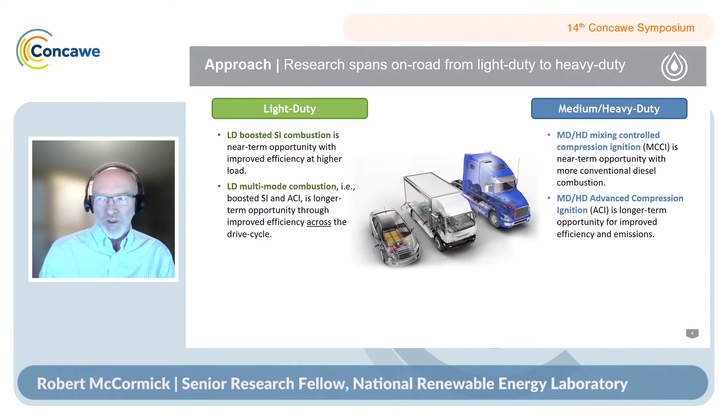Looking at the program's outcomes from a very top level, you can see that we were quite successful at demonstrating the potential to significantly improve the efficiency of light-duty engines using engine designs that were optimized for fuels having the right properties.

The work I'll speak about in the rest of my presentation is on medium and heavy duty fuels, where we've identified a number of different blend stocks that have performance advantages as well as significantly reduced life cycle greenhouse gas emissions. We've also identified a potentially lower cost path to reduce engine-out and criteria pollutant emissions.

The whole idea of Co-Optima, whether light duty or heavy duty, has been to focus on the concept that equivalent fuel properties result in equivalent performance regardless of fuel chemistry. But of course we have to pay attention to fuel chemistry, because the people trying to make the fuels work at a molecular scale level. We've spent quite a bit of time developing molecular structure property relationships and trying to understand how fuel chemistry affects properties.

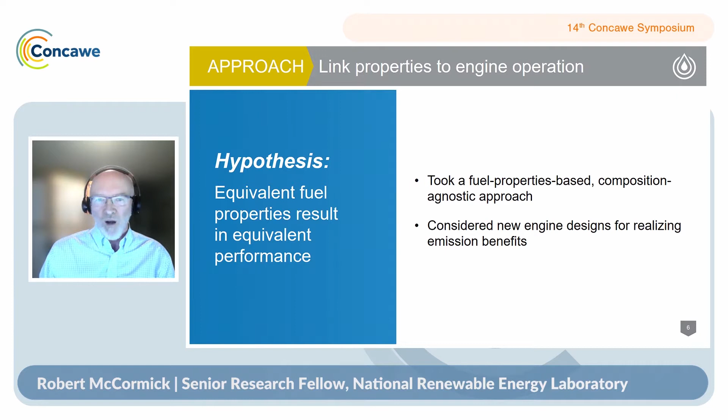But when it comes to engine performance, we've focused on fuel properties. For diesel fuels, anyone who works on them will be quite familiar with this list of properties. The fuel has to rapidly ignite, it needs to completely vaporize, and cold weather operability can be an issue, so we need fuels with a low freezing point or a low cloud point.

Fuel pump and injector operability or durability is a critical feature. Fuel has to be handled safely, and stability and storage can be a significant issue for certain fuels.

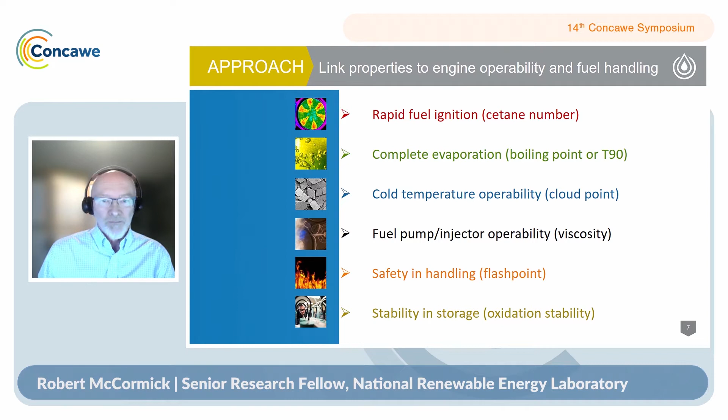Our approach to identifying fuels was looking in the literature and to biofuels researchers. We came up with on the order of 1,000 potential biofuels, which were then screened based on their properties.

At a very high level, the tier 1 screening was just: can it be a fuel? Does it boil in the right boiling range to be a diesel fuel? Does it have a high enough cetane number and other properties? For some of these materials, the properties were just predicted—we didn't have any volume of the material.

At the next level, we tried to measure properties that had been predicted, and Co-Optima has been a blending strategy where we're focused on blends with petroleum-derived fuel of up to about 30 volume percent. So in some ways it's a transitional strategy from where we are today to where we need to be by 2050. Obtaining the blend properties was important in the second tier.

And then in the third tier, we're actually evaluating fuels in engines, looking at well-to-wheels greenhouse gas emissions, and performing techno-economic analysis regarding the fuel production.

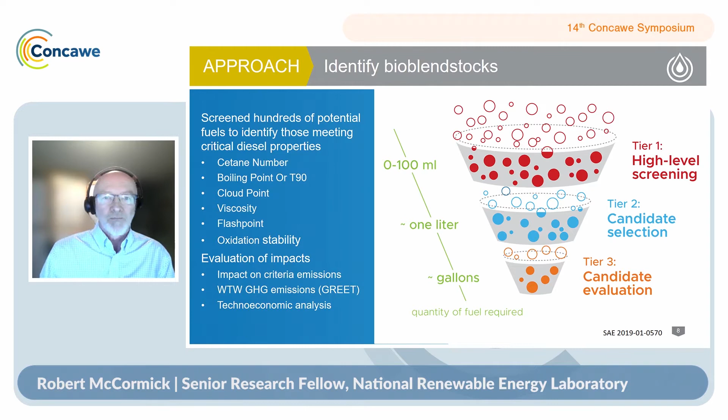So here's the outcome of a lot of that effort: 13 blend stocks that have at least the potential to reduce greenhouse gas emissions significantly. They have good fuel properties and potential to be produced at larger scale for those that are not produced from fats and oils.

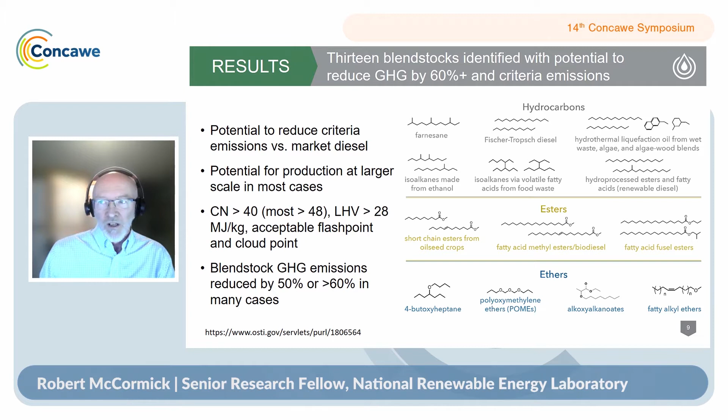We have the fats and oils produced fuels, biodiesel and hydrocarbon renewable diesel, on this list, but the other fuels are generally produced from larger scale available biomass feedstocks.

In terms of entering the market, the hydrocarbon fuels, of course, have the lowest barriers. There's a set of ester fuels—there are esters on the market today, so there would be more barriers to putting these on the market than the hydrocarbons. But the ones with the highest barriers entering the market are the ethers, which have not generally been used in commercial diesel fuels.

Potentially, some of these would require storage stability additives, and an assessment of toxicity and biodegradation is critically important. That's ongoing and should be available in the next few months.

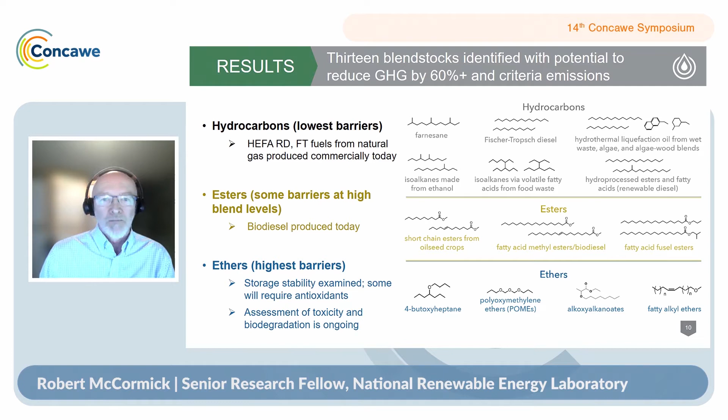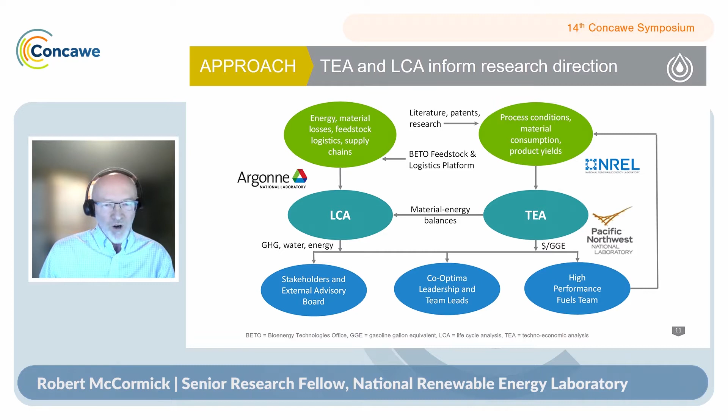So in order to analyze the environmental impacts and potential costs, we've used the Argonne National Laboratory's GREET model, and coupled that with techno-economic analysis—essentially a top-level process design that gives us energy inputs to make the fuel. The techno-economic analysis itself gives us a modeled fuel selling price that we can compare.

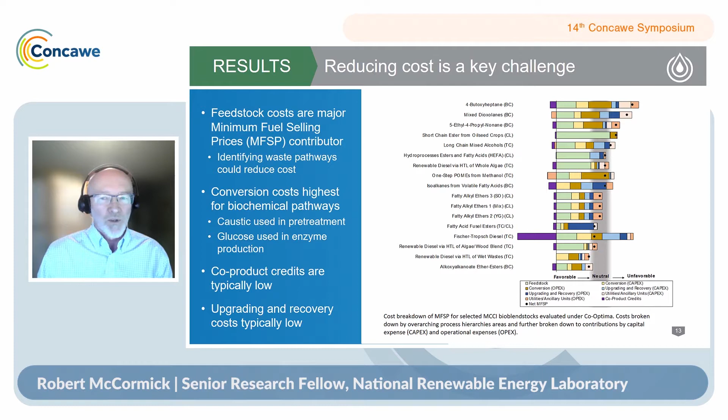There's a few that have modeled selling prices that are barely in the favorable range, and that's because they come from extremely inexpensive feedstocks, such as wet waste.

I'll go into just a couple of details. Here we have an example of hydrothermal liquefaction, where one could do it from wet waste with a water treatment as the first step, or from algae, which eliminates that step, or from woody biomass more directly.

The woody biomass has higher greenhouse gas emissions in its production and higher costs. But if we look at the algae case, we're just barely meeting our greenhouse gas emission reduction target of 60% with costs in the neutral range. But if we use the very inexpensive wet waste feedstock, we can get significantly lower greenhouse gas emissions and have a modeled cost that's starting to look more reasonable.

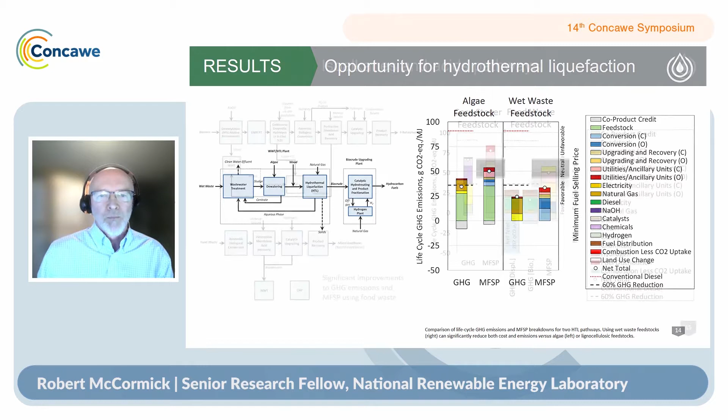The other example I'll show is isoalkanes made from volatile fatty acids. If you start from biomass, you have on the top a fairly complex process, but if you start from very inexpensive food waste, you have a lot fewer boxes in the flow chart.

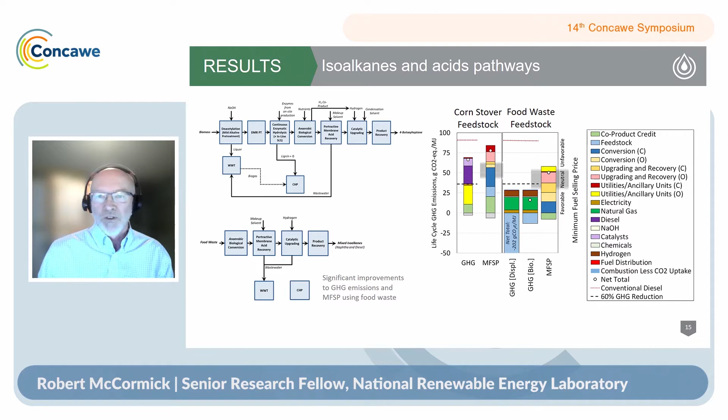From a biomass feedstock called corn stover, we're unable to achieve our greenhouse gas emission reduction targets with this feedstock, and model costs are high. But if we use food waste, which is of course not available in anywhere near the same quantity as corn stover, we can, depending on how you allocate, achieve significant greenhouse gas emissions reductions or even very large ones, and model costs are starting to look more favorable.

The next aspect is moving into examining these fuels and engines. I'll show you some data acquired in a single cylinder research engine that was built to be exactly the same as a commercial medium duty engine produced by Ford.

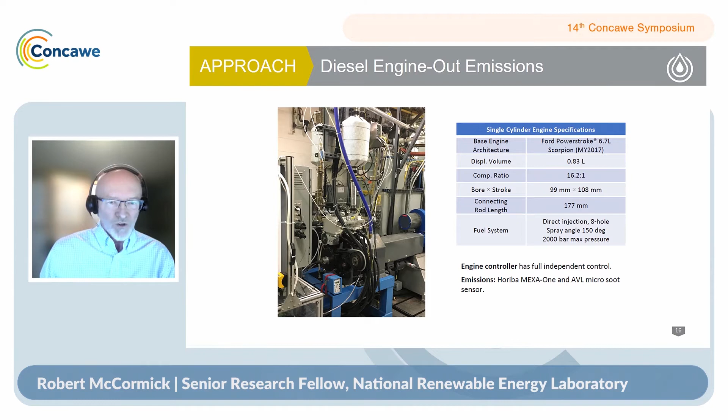As a single cylinder engine, we have control over all the engine operational parameters, as opposed to testing these fuels in an actual commercial engine in a vehicle, where the manufacturer's computer would control the engine operation.

We tested these as 30% blends, and so the list of fuels is here. These are fuels from the previous list, or in some cases surrogates for them - by that I mean similar molecules that we could obtain in the tens of liters quantity required for engine emission testing.

The chart here is a NOx soot trade-off chart where we show NOx emissions on the x-axis and soot emissions on the y-axis, and we're doing a sweep of exhaust gas recirculation. Out here on the right at 5 grams per kilowatt hour of NOx, we're about 25% EGR rate, and then we increase EGR, which reduces NOx, but at some point causes soot to go back up.

The black line at the top is the conventional petroleum-derived fuel. The next group are the hydrocarbon biofuels, and then we move into the oxygenates. You're able to go to higher EGR rates without seeing a spike in soot emissions.

And then for the polyoxymethylene ethers, which are the purple line at the bottom, it's very difficult to get this material to make soot, so it can tolerate very high levels of EGR, achieving quite low NOx emissions. But while these results are good, they're not big enough reductions to really change the design or the size of the diesel emission control system used on heavy duty engines today.

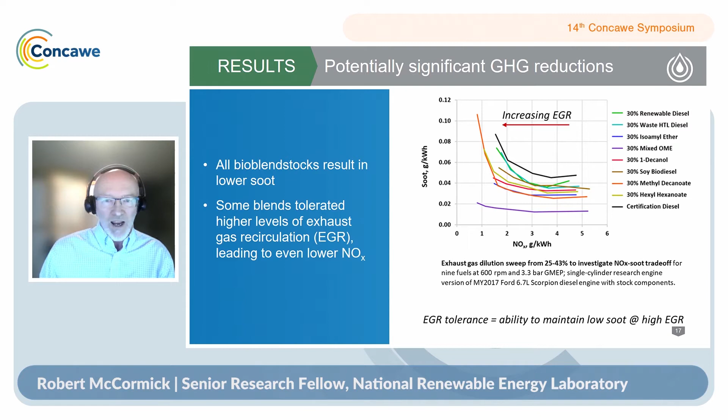So we looked to engine combustion changes to try to achieve lower emission levels. My colleague at Sandia National Laboratories has developed an approach called ducted fuel injection that is motivated by a Bunsen burner concept.

If you look at the Bunsen burner on the right, the fuel is injected through the nozzle in the center into a tube or a duct, and this causes a lot of air to be entrained from the holes in the bottom of the burner.

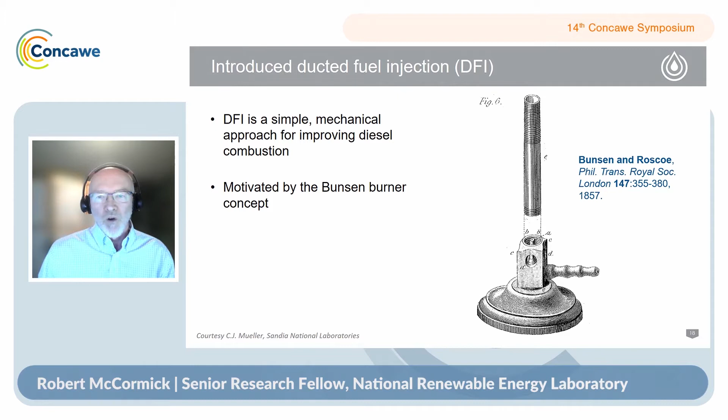You can actually do the same thing in a diesel engine. This photograph is a high-speed photograph taken from a single-cylinder diesel engine that has an optical window in the cylinder, looking up through the piston to the engine head, where we can see on the left a 2-hole fuel injector, and the injector on the left is conventional diesel combustion.

You can see the diesel spray, and you can see the bright yellow and orange, which is incandescence from hot soot.

But the injector on the right is equipped with a duct, and for that injector, we don't see any incandescence from hot soot. We see only a blue flame, indicating that the vast majority of this soot has been eliminated by injecting the fuel into the duct and dramatically increasing the amount of air that's mixed with the fuel spray.

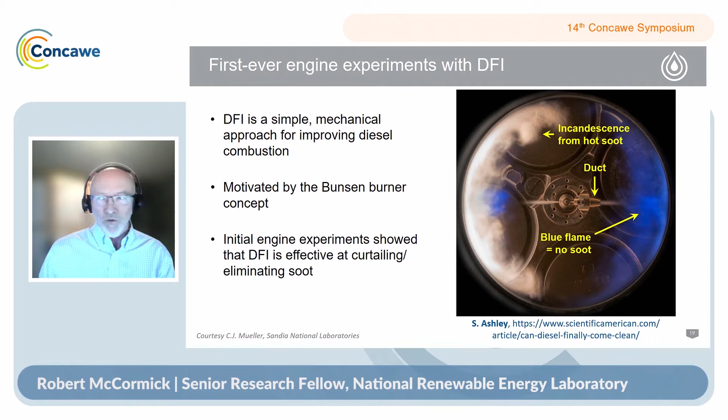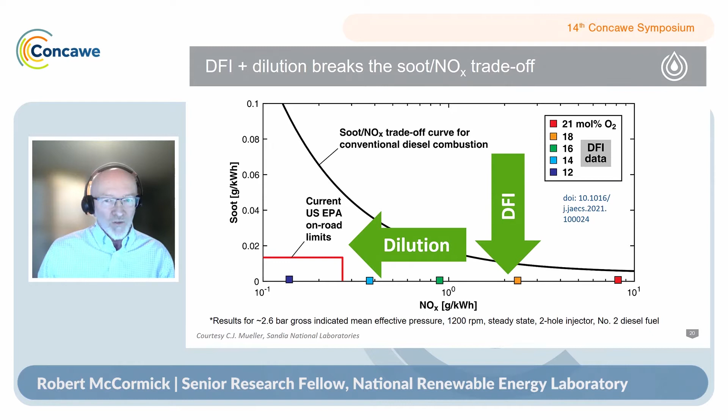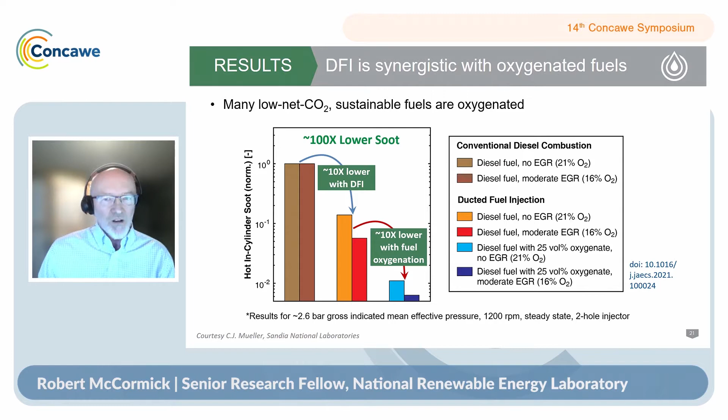At the same time, we can use pretty high levels of exhaust gas recirculation to reduce NOx. So this may be a large enough reduction that we can reduce the size and operating cost of the diesel emission control system on the engine.

So just quickly summarizing: we've identified blend stocks with relatively low carbon emissions, meeting diesel property requirements, that have reasonable production pathways from various forms of biomass. We've also identified a potentially lower cost path to reduced engine-out emissions via ducted fuel injection.

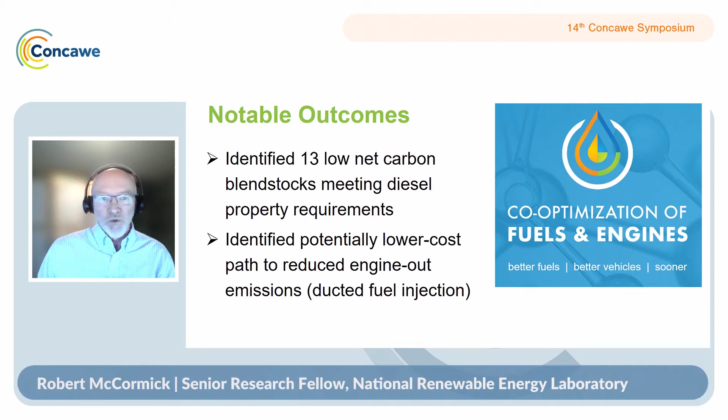To take Co-Optima to the next level and fully realize its potential, we have a number of recommendations. One is to continue working to reduce fuel carbon intensity, understanding all the factors that cause fossil carbon emissions and how we can eliminate them. Another is working to achieve higher fuel blending levels — 30% is very much an interim level — and expanding that to ultimately get up to 100% low net carbon fuel.

Working to scale up the production processes, ultimately to commercial scale. But in many cases, we just need to scale up to the point where we can make enough fuel for a really detailed evaluation. And of course, continuing to improve our pollutant emissions profile.

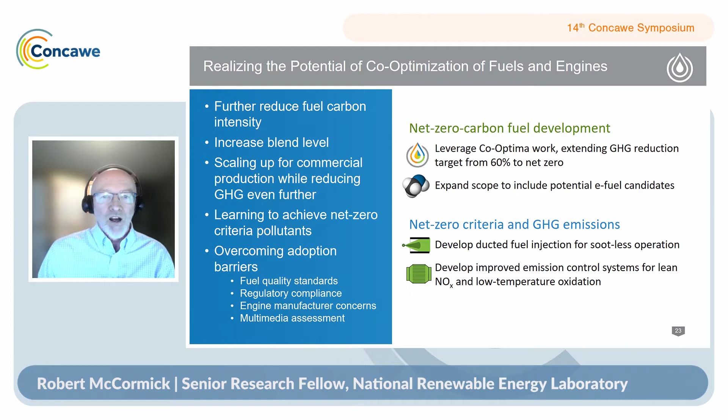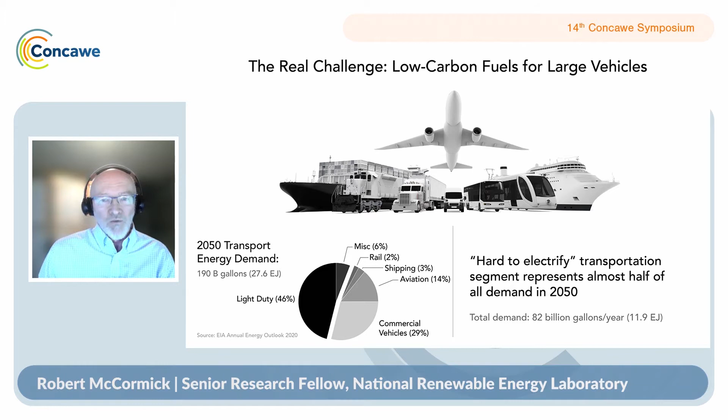Where the Department of Energy is going with work in this area is toward large, hard-to-electrify vehicles — definitely aviation, large marine vessels, and rail — with a de-emphasis on fuels and combustion for light-duty vehicles, and maybe even elimination of focus on that work, along with a de-emphasis on work for on-road heavy-duty vehicles.

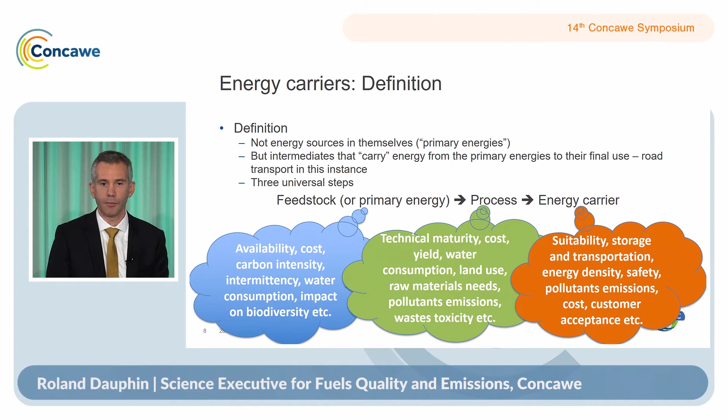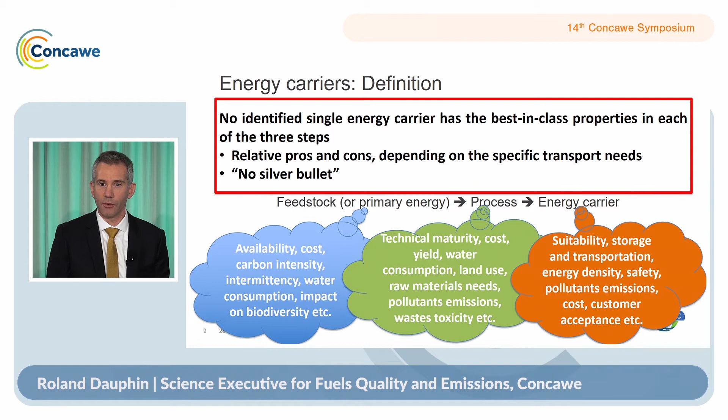When reviewing all the different existing energy carriers and the ones that can be foreseen, it's quite easy to see that there is no existing single energy carrier that has the best-in-class properties at each of these 3 different steps. At each time, you have relative pros and cons, depending on the needs of the specific transport that you are considering, which basically means, and I know that it is an idiomatic expression now, but there is no silver bullet, because, in fact, you have always benefits and drawbacks for each of the energy carriers that you may consider.

We have grouped the energy carriers in 3 different categories: electricity, liquid fuels, and gaseous fuels. So let me start with electricity first.

Our central scenario is the 1.5 tech scenario from the European Commission in their report Clean Planet for All. In this scenario, the electricity would represent more than 50% of the final energy use by 2050 compared to less than 25% today. In order to do this, the installed capacity would be multiplied by roughly 3, which is, of course, a huge increase. And by 2050, the electricity mix would be mostly renewable. 83% of the generation capacity would be renewable, mostly relying on wind and solar energy.

But it's not 100% renewable for this mix. You still have a small share of non-renewable sources with nuclear power plants, 12%, and natural gas using carbon capture and storage, 4%. If you consider the whole electricity mix with carbon capture and storage, it generates net negative CO2 emissions overall.

Additionally, as a sensitivity case, we have also considered 100% renewable electricity mix in order to compare what would be the different outcomes.

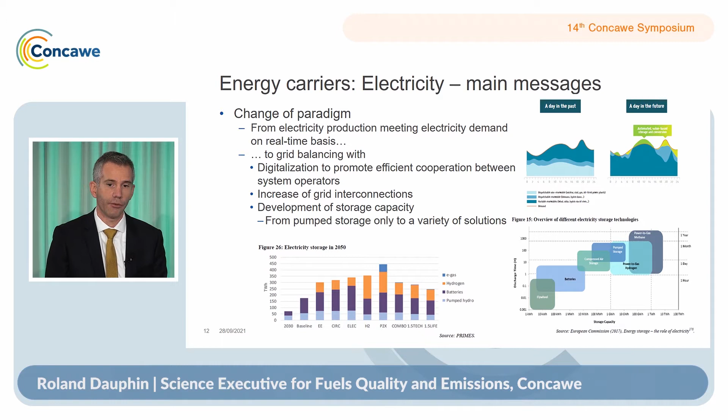Now moving on to liquid fuels, we have two main categories, and they have been mentioned quite extensively yesterday in session 1 and 2. We have biofuels and e-fuels. So regarding biofuels first, of course the stake here is to move away from biofuels made from food and feed crops to more sustainable biofuels using more sustainable feedstock.

The different processes allowing to produce these biofuels are detailed in the roadmap. It has been also detailed yesterday. I won't spend too much time on that for the sake of time.

But what is important in terms of message in our roadmap is that biofuels are not an alternative to electricity. They are a complement because both of them complement each other very well. And especially with biofuels, which can be used in many different sectors, they fit well with passenger cars, heavy duty, maritime, or aviation.

Regarding e-fuels, you probably know that they can be made out of renewable hydrogen and captured CO2. They can consist of chemically very different compounds, some of them drop-in, some not. But the real trouble with e-fuels is that thermodynamically speaking, they are very inefficient to produce. And once you put them into an internal combustion engine, you have another stage of inefficiency, which means the overall well-to-wheel efficiency of e-fuels is very low, especially compared against direct electrification.

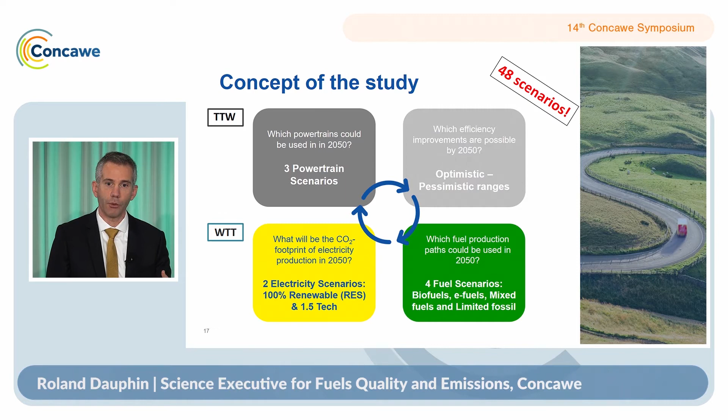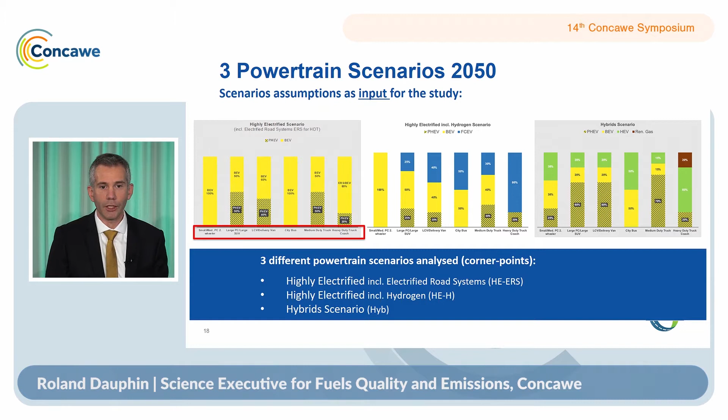For each of these scenarios, we have considered a different fleet mix for each vehicle category. On the left-hand side, you have the small vehicles category, 2-wheelers, small passenger cars, and moving to the right-hand side, you find long-distance transportation up to heavy-duty trucks.

In the highly electrified scenario, you see that there is still a share of plug-in hybrid electric vehicles. You have to know that in this case, these vehicles are highly electrified, driven between 70% and 90% of the time in electric mode. You can also see that for heavy-duty trucks, they rely on electrification either by using battery electric vehicles or electrified road systems.

For the scenario using hydrogen, the use of hydrogen is done through fuel cells and is dedicated to long-distance transports.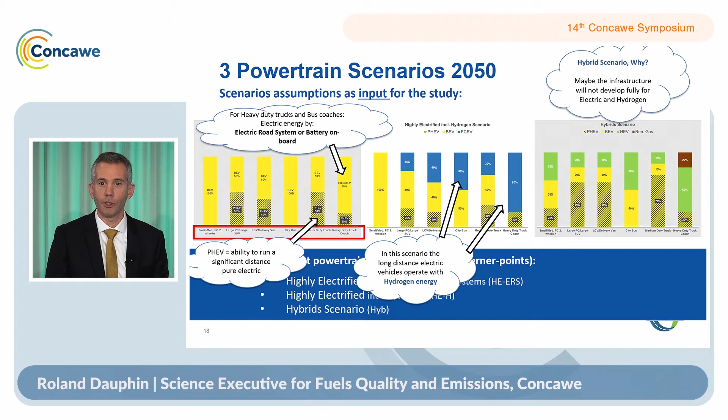The last scenario, which we have named hybrid, is a scenario in which we have considered that maybe the infrastructure regarding electricity or hydrogen would not be deployed fast enough, as in the other two scenarios, and so we would still need to use the existing infrastructure with internal combustion engines and liquid fuels.

So now some details about the fuel scenarios. We have a scenario relying a lot on biofuels, up to 90% of the liquid fuels. Another one relying a lot on e-fuels, up to 100% of the liquid fuels. A scenario which is mixed, really in the middle. And even a scenario which has a limited fossil content, only 10%, just to check what it would take in terms of compensation measures if we don't manage to get rid of fossil fuels by 2050.

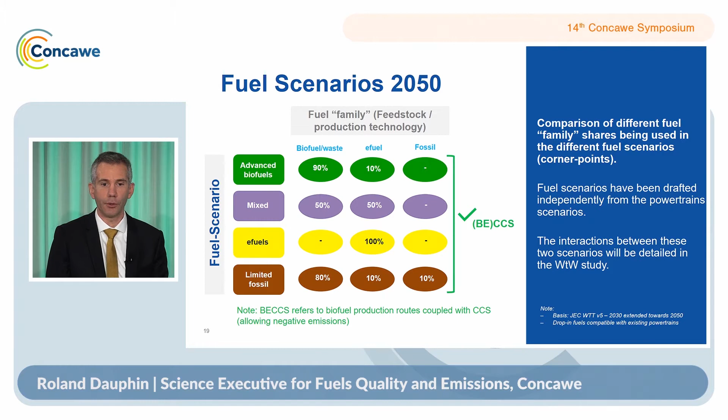In order to do our evaluation, we have simulated an energy system, and you can see in this picture the scheme of this energy system. It's quite complex, so just to try to simplify it, you will find once again the 3 steps between energy carriers and primary energies.

On the left-hand side, you have the primary energies. It can be biomass, waste, wind, solar, fossil resources, if they can be used. And on the right-hand side, you have the energy carriers, which are either direct electricity to the vehicles, liquid fuels, biofuels and e-fuels, or hydrogen, or even fossil fuels.

In the middle, you have the processes which transform the primary energies to energy carriers. And you have one masterpiece in these processes, which is the electricity generation. Electricity is used virtually everywhere, to feed the vehicle with direct electricity, but also to produce hydrogen, which is necessary to produce e-fuels, and also you need electricity to produce the biofuels. So this is really important, to care about this particular piece of the energy system.

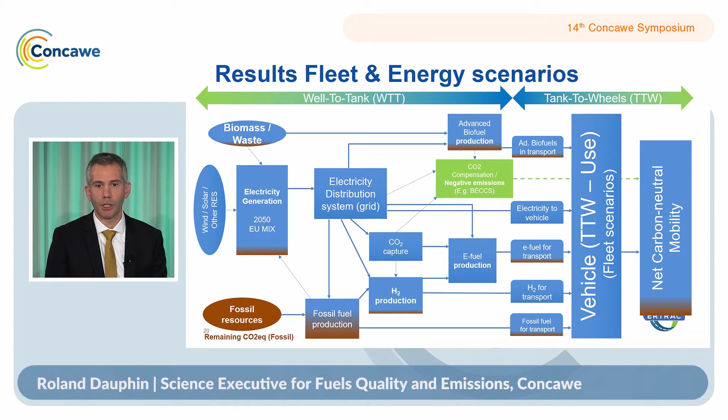Because even if you get rid of fossil fuels, this energy system is not completely carbon neutral. You need offsetting measures to compensate for the remaining CO2 emissions. And this is the purpose of this green box that you can see in the middle of the energy system, which are the negative CO2 emissions that you can generate, for instance, by using bioenergy, carbon capture, and storage.

So now, the results of the simulations. You can see here the results of the evaluations of the 48 scenarios in terms of well-to-wheel energy demand. When I'm saying well-to-wheel energy demand, it means that we have considered the energy that would be lost in producing the energy carriers, the energy that is consumed on board when you drive your vehicle, but also the energy required, for example, to capture CO2 and put it underground, or to use it for producing e-fuels.

What is interesting is to compare the different scenarios in order to understand which parameters play a great role in your energy system design. An important conclusion is that if you want to rely a lot on e-fuels with internal combustion engines, it is almost mandatory, of the highest importance, to get 100% renewable electricity, because if you don't, the well-to-wheel energy demand will literally skyrocket and reach unreasonable levels. So the conclusion is that for e-fuels, it is mandatory to get 100% renewable electricity.

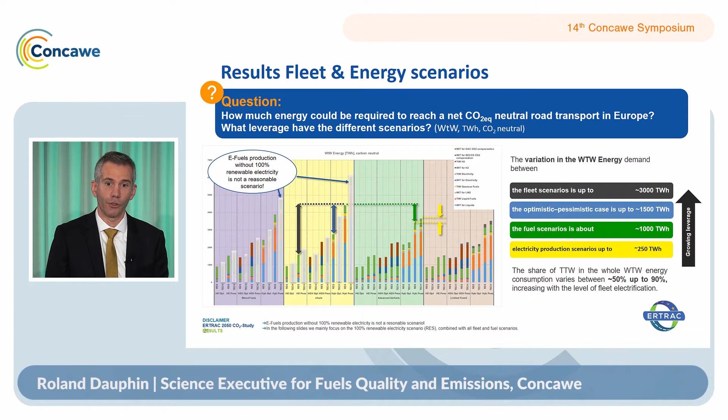So another question was about the electricity demand. You remember that electricity generation is at the core of the future energy system, and how much electricity you would need in this future energy system, how much electricity you need to generate. And here the range is really huge.

In fact, the range is between 20% of today's electricity demand and up to 160%. The lowest range, 20%, is still very significant, but it's reached in scenarios where you rely a lot on internal combustion engines and biofuels. This is where you need the least amount of electrification. At the other end of the spectrum, you have still internal combustion engines, but this time fed with e-fuels, and this is where you reach 160% of today's electricity demand in Europe.

And of course this is a huge number, which has to be, I remind, 100% renewable, and you may wonder if it's reasonable to consider such a high amount of renewable electricity by 2050 only for road transport. In the middle, and rather towards the lower end, you have the highly electrified scenarios, which require between 40 and 55% of today's electricity demand, which is still, as you may consider, very significant.

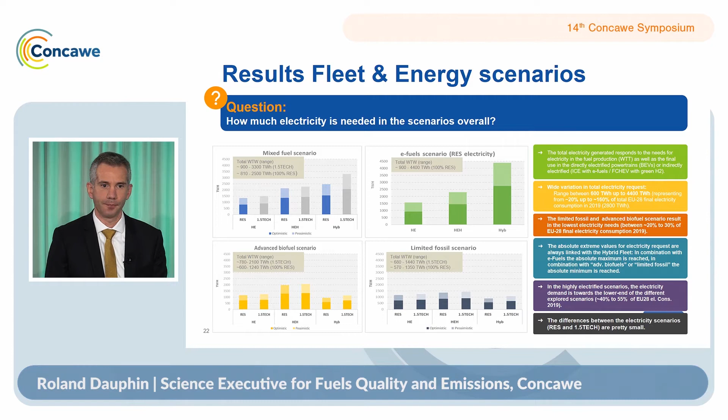So some conclusions to finish my presentation. We have seen that developing a carbon neutral road transport is something very, very complex, and even beyond the well-to-wheel evaluations, which are far from being simple, there are other parameters which must be considered. The scalability must be granted. It means that the critical minerals have to be available to allow moving on with the renewable system. If you consider biofuels, biomass must be available, water supply must be ensured, and so on.

Because we will rely on intermittent renewable energy sources, it is important to ensure that energy supply is secured at any time. And it means we have seen that cooperation between flexible demand, cooperation between the users, and also storage is needed. Customer acceptance is key, because you won't manage any transition without the customer. And in the end, we see that we need a systemic evaluation to ensure that the whole system is viable.

And it really means to care about every detail, because it is enough to miss just one of these details to have a failure of your whole system. For example, if you don't have the critical minerals, you cannot succeed in electrification. If you don't have biomass, you cannot succeed in biofuel production, and so on. So every detail is very important, and of course, it generates uncertainty.

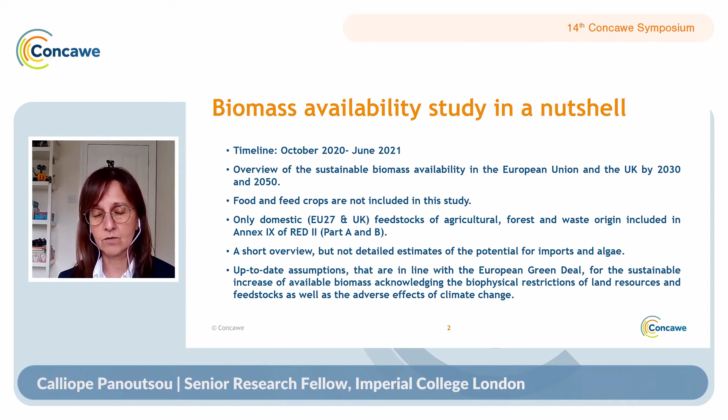It includes only domestic feedstocks from agriculture, forestry, and waste, as they are included in Annex 9 of the Renewable Energy Directive, both in Part A and B. We have not assessed in detail, but we have included an overview of the potential for biomass imports and aquatic biomass algae based on work done before by colleagues. The assumptions for the scenarios are brought up to date and are in line with the European Green Deal, taking into account issues having to do with biophysical restrictions of land availability, as well as the evolution of the impacts of climate change on agriculture and forestry.

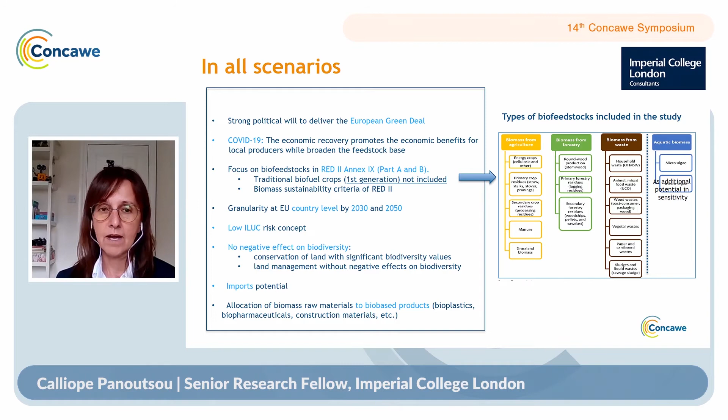In all the scenarios, we have assumed that there is a strong political will to deliver the European Green Deal. We have made the assumption that COVID-19 will bring positive impacts if sustainable biomass is being developed, because it can bring benefits to local producers while also broadening the feedstock base. The granularity of the report is at EU country level. We have also addressed the low indirect land use change risk concept, and we have assessed two types of potentials: the technically available sustainable potential for all markets, and also, after excluding the known demand for bio-based materials, the potential available for bioenergy and biofuels.

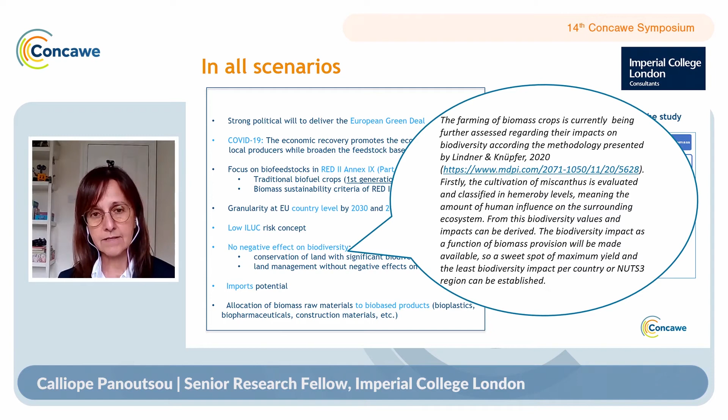There is also special provision for biodiversity. There is an ongoing study that builds on ours, in collaboration with colleagues at Fraunhofer who are leading it. They are working on detailed biodiversity assessment of specific case studies in two European countries, Germany and Bulgaria, as examples. They will apply the methodology, and the aim is to have the biodiversity impact as a function of biomass provision, trying to understand sweet spots of maximum yield and least biodiversity impact at NUTS3 regional level. The study is ongoing and expected to be published early next year.

There were three scenarios in the study. We had the low mobilization scenario, which assumes that farming practices, forest practices, and waste recycling rates remain at 2020 levels. We have the medium scenario, where we have improved mobilization in selected countries.

The rationale behind selecting the countries is of dual nature. We have countries, all of them selected in the medium scenario, that have high biomass potential, higher than 20 million tons per year.

But there's a combination of a set of countries which have strong infrastructure, a good institutional framework, policy, and knowledge. These are primarily countries in the northwestern part of Europe, like Germany, France, Sweden, Finland, United Kingdom, Austria, and Spain. And there are countries towards the east, like Poland, Romania, Czech Republic, Hungary, and Bulgaria, that do not have the developed infrastructure, but they do have low costs in the biomass supply.

And there is a third scenario, a high scenario, which has enhanced availability and improved mobilization for all the countries. The improved research and innovation issues include increased yields, improved practices in harvesting, management, and collection, and also, in terms of waste, improved separation and collection of the bio-waste fraction that can be used for energy.

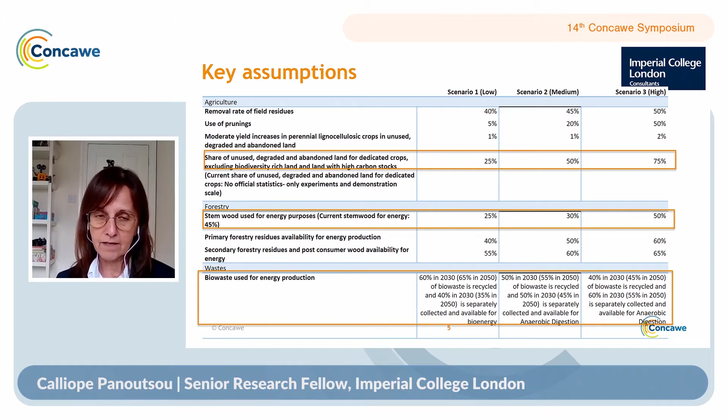And when it comes to waste, we have taken into account all the numbers of the Waste Directive and the recent circular economy policies that promote recycling. We have fixed the ranges between the low, medium, and high scenario in a way that matches the future projections from these documents.

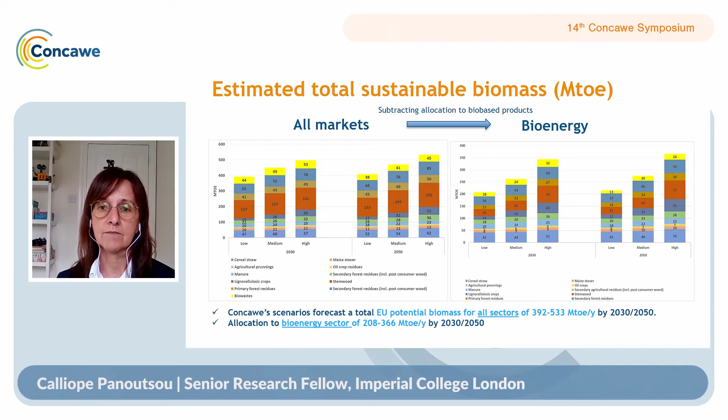Having performed all the analysis, we have a forecast for all markets of 392 to 533 million tons of oil equivalent per year by 2030 and 2050. And when the currently known demand for bio-based materials and products is extracted, then the available biomass material for the bioenergy sector ranges from 208 to 366 million tons of oil equivalent.

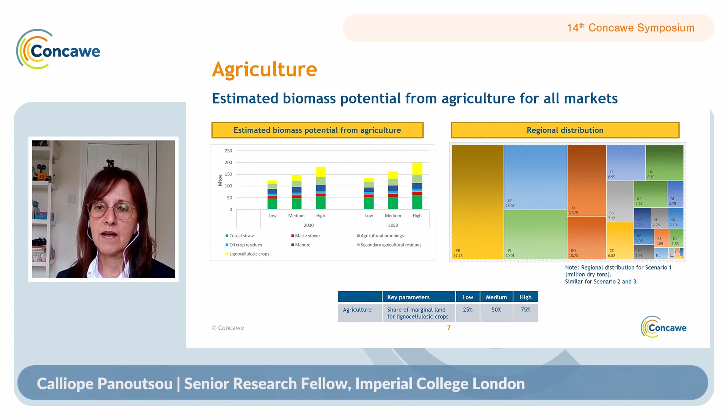For agriculture, the regional distribution is closer to countries like France, Germany, Poland, Spain, and Romania. The critical assumption is the new biomass which comes from degraded, unused, and abandoned land. As we mentioned, in the low scenario we assume only a quarter of this land is brought into productivity for bioenergy and biofuel crops. For the medium scenario it's 50%, and 75% for the high scenario.

Important considerations: the potential is there, but it is important to highlight that biomass potential and availability in this study are based on very conservative assumptions, as I tried to name. Furthermore, we have assessed feedstock that is within Part A and Part B of Annex 9, but not all the categories, because not all of them have consistent statistical data sets that could fit our methodology and modeling. So there's more potential for the feedstocks we have not assessed. Therefore, it can be concluded that the biomass potentials would most probably be higher than those estimated by this study.

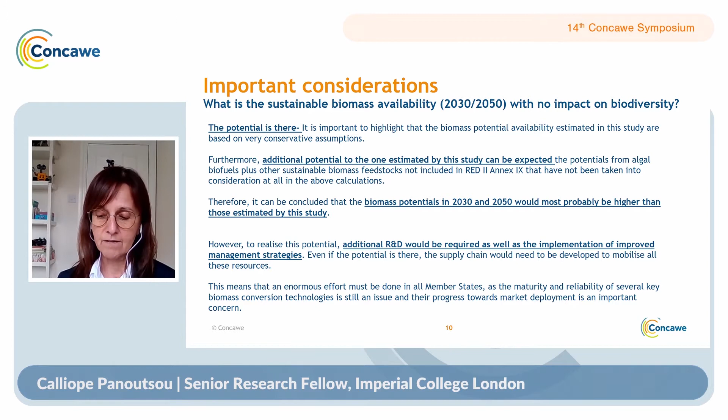However, as all colleagues and recent studies on biomass supply and feedstock availability show, additional research and development will be required, as well as implementation of improved management strategies on the ground in forests and agricultural fields. Even if the potential is there, the supply chain needs to be developed to mobilize these resources. An enormous effort must be done in all member states, as the maturity and reliability of several key biomass conversion technologies is still an issue for increasing TRL levels. It's very important that feedstock supply is developed quickly, together with the technologies.

And the conclusions: sustainable biomass availability with no impact on biodiversity. So far there are many publications providing different ranges, and they're not always transparent about assumptions. We tried within the study to compare with studies that had open data sets and open assumptions.

The main results of the study we have done at Imperial College are that the total potential availability ranges from 392 to 533 million tons of oil equivalent per year. If we extract the known uses for demand from the bio-based sectors, then we have 208 to 366 million tons of oil equivalent per year.

We have to add here that the Fit for 55 impact assessment of the European Commission's document allocates 120 to 170 million tons of oil equivalent to bioenergy. This means that the potential availability of feedstock we have estimated allows an additional 88 to 196 million tons of oil equivalent per year for biomass for the transport sector, which Concawe, as far as we know, will use to support further assessments on the potential deployment of low carbon fuels in the transport sector towards 2050.

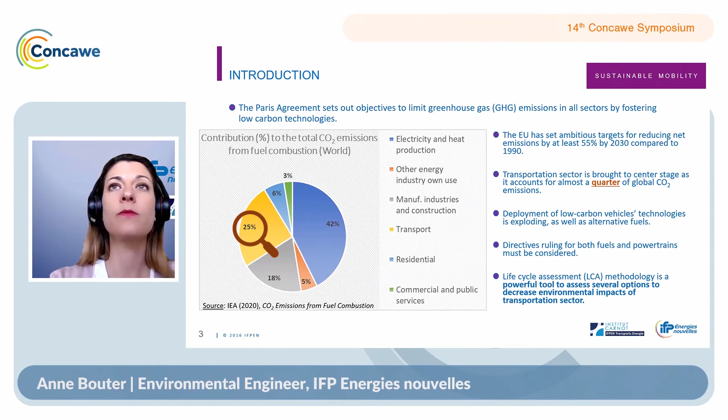Life cycle assessment is a methodology aimed at quantifying the environmental impacts of a product or service, as part of an eco-design approach or with a view to selecting the optimal solution. All potential impacts on the environment are quantified and the consumption of resources is examined, from extraction of raw materials to treatment of waste, also called cradle to grave. It is therefore a global, multi-step, multi-criteria approach governed by ISO standards, which aims to avoid environmental impact transfers from one stage of the life cycle to another, or from one environmental impact to another.

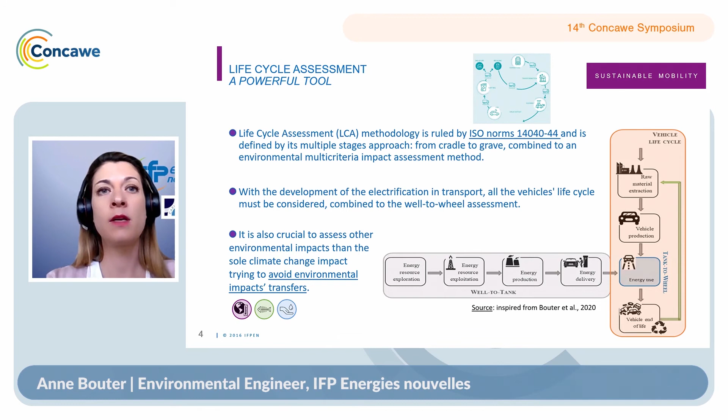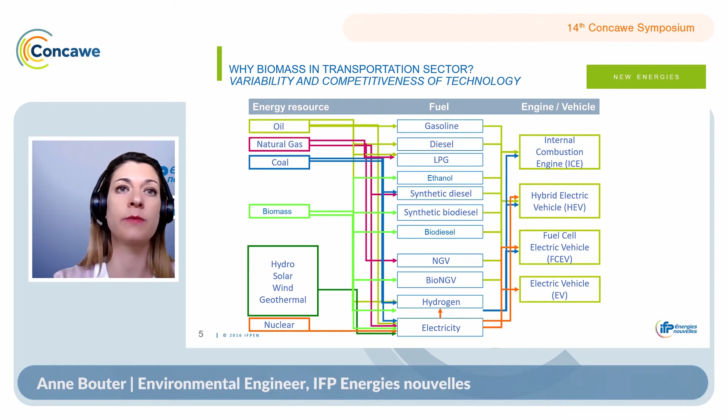A few reminders about biofuels. Biofuels are incorporated in two energy pathways: diesel, in which are mainly incorporated FAME, produced with oleaginous plants, and hydrotreated vegetable oils; and the gasoline pool, where ethanol is the main incorporated product, from sugar-rich and starch-rich plants such as sugar beet, maize, or wheat.

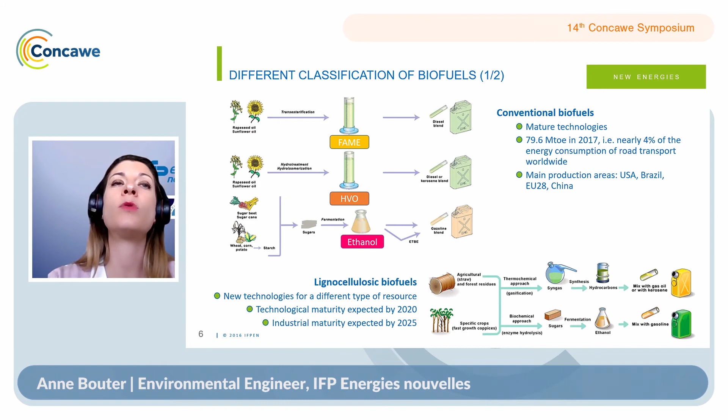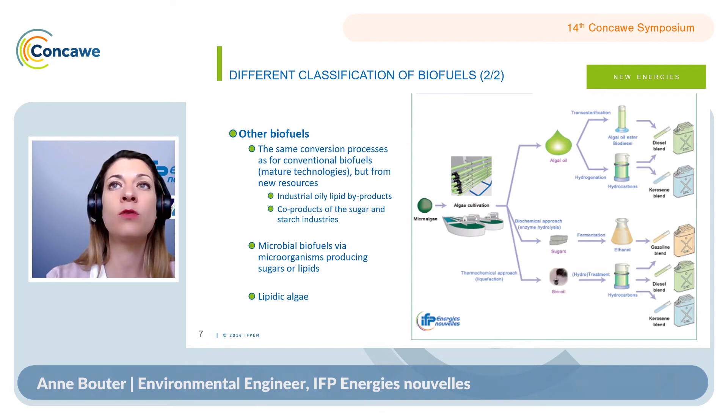There are also new resources for mature technologies. At short term, oily industrial byproducts and co-products of the sugar and starch industry. At short to medium term, other non-food crops such as jatropha. And at longer term, microbial oils or lipidic algae.

A brief presentation about life cycle assessment applied to biofuels and the related scope definition. The main steps are the cultivation and harvest of biomass, followed by conversion, distribution, and use, with intermediate transport stages considered in between.

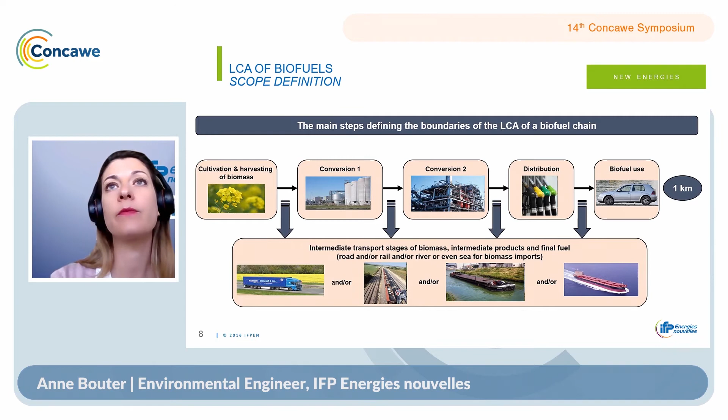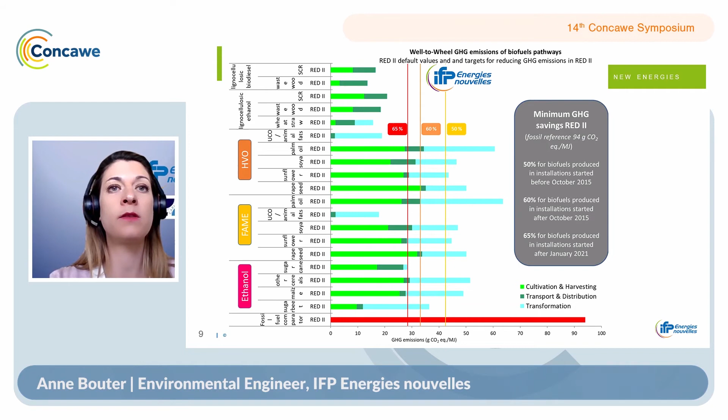From 4% for an HEV to 45% for an EV with a battery of 40 kWh, and 55% for an EV with extended autonomy with a battery of 60 kWh.

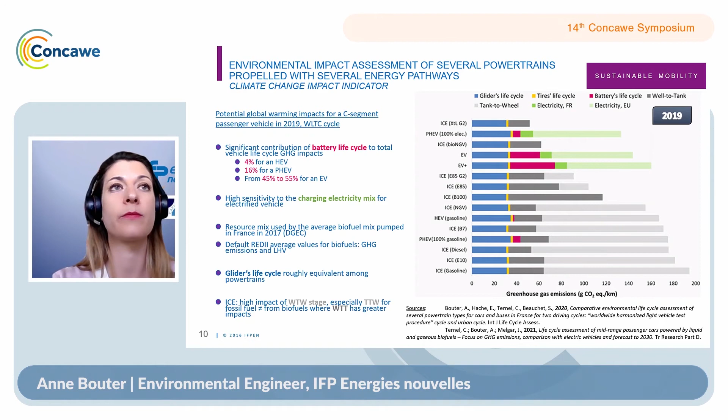As I showed on the slide before, batteries' environmental impact has a significant contribution to the total life cycle of electrified vehicles. It seemed of high interest to look at this subject, especially due to the market's growth of electrified vehicles. The European Commission is expecting a 14-fold growth forecast by 2030, and thus we really need to properly assess the environmental impacts of batteries production.

The answer is not so simple, as we performed a literature review on the subject, and results are very dispersed. In order to fill the gap, we performed a meta-analysis study which is submitted to a peer-reviewed journal. In the meantime, I'll present you some results for 4 lithium-ion battery chemistries regarding the global warming potential indicator.

However, global warming potential is not the only environmental indicator that we can study with life cycle assessment methodology. We can say that depending on the battery's chemistry and its size, BEVs have lower potential environmental impacts on climate change than their thermic counterparts. But what about the other environmental indicators?

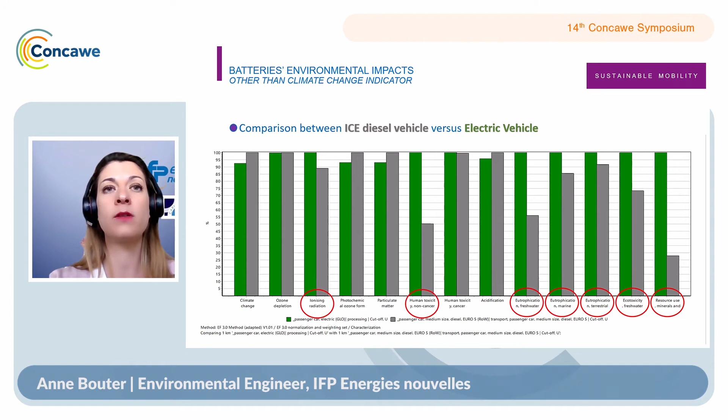The process contribution analysis for batteries' life cycle shows that 72.3% of the impact is related to gold. This is not surprising, as the ADP indicator identified gold with the highest characterization factor. Gold comes from the use of printed wiring boards to produce batteries. Gold is followed by copper, silver, nickel, zinc, and tin.

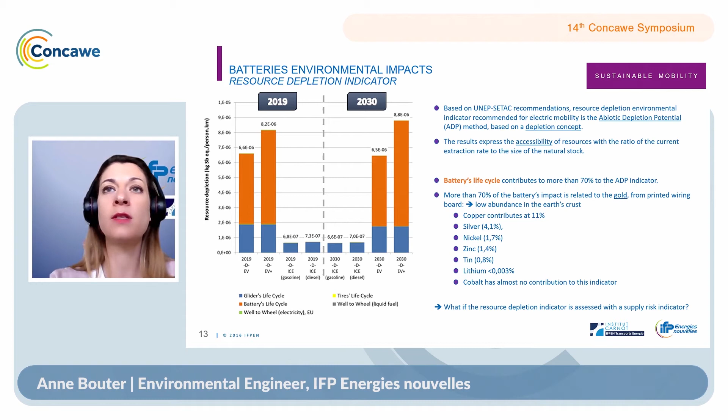Lithium's contribution to the abiotic depletion potential indicator is less than 0.003%, and cobalt has almost no contribution to this indicator. However, it is important to consider the depletion of resources through geopolitical risk. For this reason, a criticality indicator, also known as a supply risk indicator, can be assessed.

Results are generated with a techno-economic model based on a TIMES generator. This is the same kind of model which is currently used by IEA. The objective function is to minimize the entire costs of the energy system, and it is a bottom-up model.

The model allows examining 2 climate scenarios, +2 degrees and +4 degrees, in order to estimate the consequences of the fast rollout of low-carbon technologies in the transport sector and how it is likely to significantly increase metals demand by 2050. The import dependency on metals of the European Union in its attempt to electrify its transport sector was evaluated in order to estimate how this dynamic could increase metals criticality for this area.

This notion of criticality is often described as all the risks related to the production, use, or end-of-life management of a raw material, including geopolitical, economic, production, and environmental or social risks.

Results show that the transportation sector accounts for 26.9%, 85.6%, 40.6%, and 69.8% of copper, lithium, nickel, and cobalt, respectively, for the more climate-constrained scenario, which is non-negligible. Also not shown here, the copper and cobalt consumption in 2050, all sectors considered, will be more than 90% of the worldwide known resources in 2010.

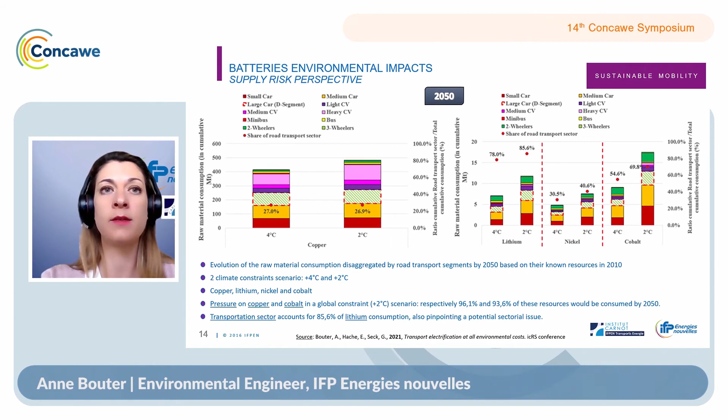The main impacts come from the production of H2, depending on whether the electricity has a low carbon footprint or not. Regarding the cumulative energy demand environmental impacts, we found that driving on e-fuels is 2 to 3 times more energy intensive than other alternative pathways.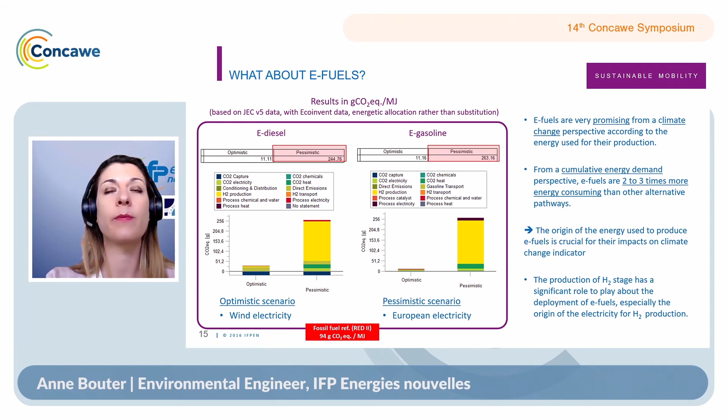For biomass, the pros are its potential abundant availability and drop-in aspects. This is counterbalanced by the potential debate of food versus fuel for some biomass sources and the question about direct land use change and indirect land use change. Another disadvantage could be the tailpipe pollutant emissions other than CO2.

Regarding electric vehicles, they have a great interest in reducing tailpipe emissions to 0 and could really be a game changer for GHG reduction, depending on battery weight and energetic sizing. On the other hand, batteries consume several critical raw materials, and battery end-of-life management is a significant leverage point. E-fuels are an interesting solution depending on their production pathway, but are very energy-consuming and expensive.

To conclude, life cycle assessment is a very powerful multi-criteria environmental decision support tool to guide future policies. This is a decision support tool sensitive to hypotheses, and sensitivity analysis must be performed. Large-scale scenarios must also be assessed to avoid scale effects of analyzing one product. It is the diversity of low-carbon solutions which seems to be the smarter way.